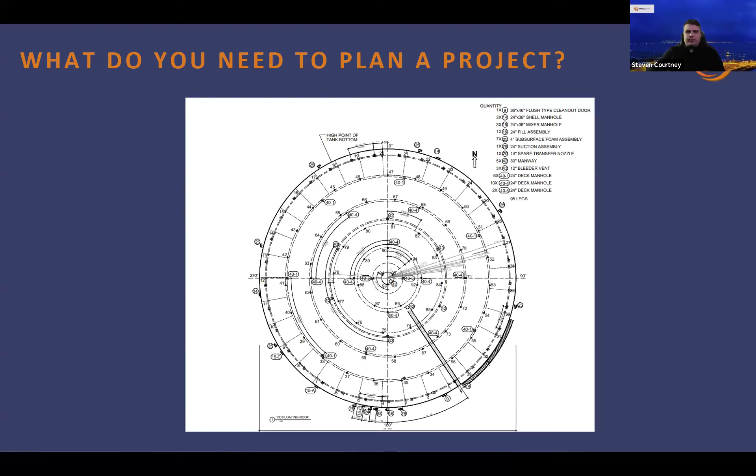So yeah, storage tanks represent a huge point of uncertainty in oil and gas operations. There seems to be a mentality that it is what it is when it comes to cleaning costs. I personally have written more change orders than I'd care to admit, and oftentimes it's not the fault of the cleaning vendors or the contractors on that end. If you're not given clear information, how are you supposed to put together a budget and execute that in a timely fashion?

Imagine you were asked to quote a project where you're told there's basically going to be 12 to 18 inches of pudding consistency slop in the bottom of a tank. You build your plan, you pick your equipment, you bring the crew out, and you pull the doors off, and there's 5 feet of packed sand across the floor of that tank. What do you think that's going to do to your budget and timeline? And I can tell you, because that's actually a true story, and it was part of the inspiration for getting into TankScope and tank profiling, and just feeling like there had to be a better way.

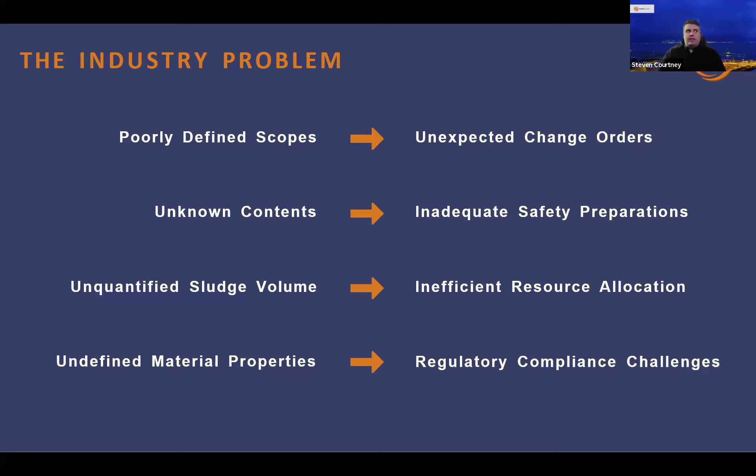We often hear from clients of timelines and budgets exceeding 400% of the set budget, and getting stacks of change orders that are continuously piling up, and it's really just not an acceptable way to manage these kinds of circumstances.

So we're going to start by talking about some of the historical methods of tank assessment. Historical is probably too kind of a term, because these are still things I see going on in this industry almost every day. We come across similar types of tank assessment methods, if you want to call it that. The most common thing that you see on every tank is just historical tank tracking.

And it's really just a nice way of saying, asking someone what was in the tank last time they cleaned it. I've been asked to call people who don't even work at the company anymore or are retired to figure out what was in that tank the last time they opened it. And that's 20 years ago in some cases, and obviously retired and out of the business for a while. These are not accurate or reliable sources of information.

Next thing we see a lot of is thermography. When done well, it can be a useful tool, but the truth is it's more of an art than a science at times, and we see a lot more bad thermal data than we do good thermal data that leads to inaccurate RFP, RFQ assessments. And even if you do get accurate data, it's really only indicative of what's going on right at the shell side of the tank, right where the sludge is in contact with the walls. It doesn't tell you anything about what's going on any further into the tank than that.

And the next thing we've seen over the last couple decades is sonar technology coming out for tank assessments. It has a lot of limitations and can provide some pretty inaccurate data. In my experience, it struggles with things like water in storage tanks, which is a natural byproduct of crude production, and it's in there until it settles out and can be dewatered. It also struggles in low sludge environments, overrepresenting sludge, which can lead to completely misrepresenting the tank contents.

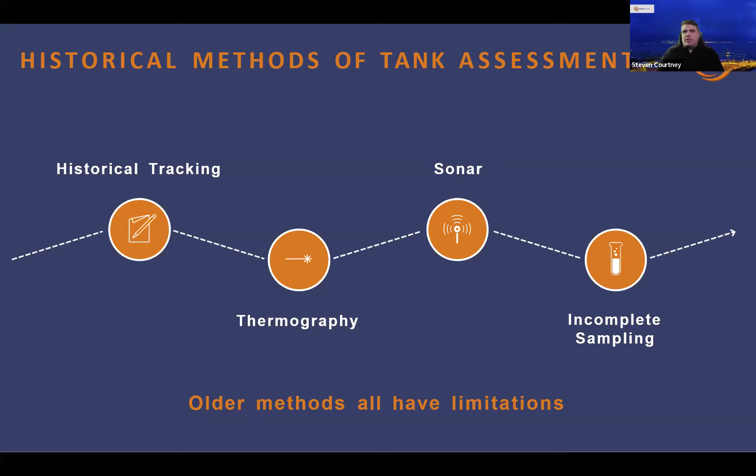And even if it is accurate, again, a little like thermography, you're not getting the whole picture because you aren't getting the actual material samples, and it doesn't know the difference between an emulsion and a heavy sludge or different types of sludge in a tank. So that ties into the incomplete sampling idea. It's not uncommon to get a sample off of a low valve or a water draw and have someone say, well, this is from the bottom of the tank, so therefore it's the sludge. Well, if you have sludge piled up against a far wall, obviously that's not representative of what we're trying to capture here, right?

So what are the consequences of these types of planning methods? The obvious ones, as we touched on earlier, is change orders. I think that's something that resonates with a lot of people. And just the cost changing from what was budgeted, but not just that, but the project timeline extensions and having your tanks out of service for an extended period of time. Not being able to utilize that asset can be a much larger cost than even just the change orders and the extended costs in the field as well.

The other thing is safety incidents and environmental noncompliance. If you aren't actually quantifying what that material is, the hazards that are associated with that material in a real quantifiable way, then you can't say that you can actually build a proper safety plan or a proper disposal plan if you aren't actually getting accurate information about what that material is.

So that brings us to the solution here. We see this as a three-pillar approach. Number one is volume assessments, but not just the volume itself, but a map of the distribution. Where is it located in the tank? Second is material characterization. So not just how much is there and where is it, but what is it? What is in the sludge? Are there hazards associated with that? Is there maybe good material associated with that? Oftentimes we see really high hydrocarbon percentages that could offset the cost of a lot of these tank cleaning projects that often go to disposal or otherwise are wasted.

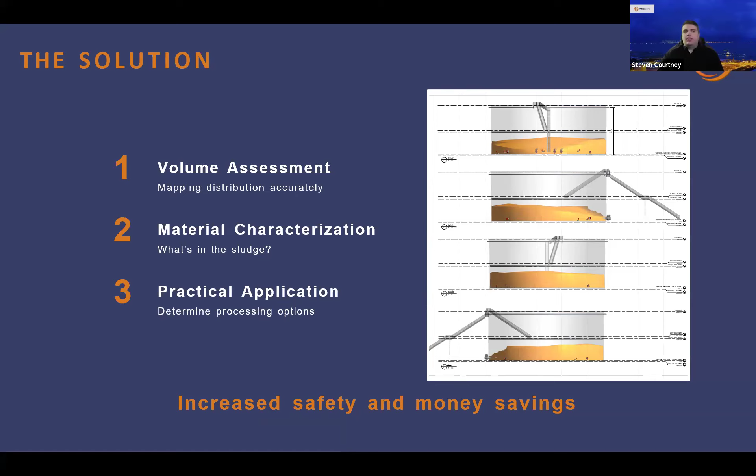And that ties into part three, which is the practical application. Once you have all this data, the volumes, the locations, the distribution, material characterization, what can you actually do with all that to improve storage tank management, storage tank design, and cleaning and sludge removal and recovery? So we're going to touch on all of these as we move through here.

So first thing, as I said, accurate volume assessments. Expanding past thermography, to get a proper volume and distribution and topography assessment, you actually have to go and take data from across the surface of the roof and the tank area to build and integrate an actual distribution profile. You can get very accurate data this way, and it allows for much more accurate planning of tank cleaning projects.

For example, even just from this picture here, you can see if you were to try and jet mix this in a standard way, you'd likely try and circulate it and/or mix it from all the different quadrants of the tank. And really, you'd probably be wasting 2/3 to 3/4 of your time attacking sections of the tank that don't even have sludge, when you could do a much more targeted approach and figure out where exactly you should be attacking this from and how to best manage this.

And it also gives insight into the type of equipment. Will you have enough effective range to really reach this? Do you need to go through the roof? Is there going to be something left for cleaning at the end? And then even some basic insight into, well, if we've got sludge accumulating here, maybe we can look at better jet mixing nozzles or better mixers as we progress past the cleaning and into permanent sludge reduction, which would be the goal. As nice as it is to have good planning tools, ideally removing the need for all of this would be the end goal.

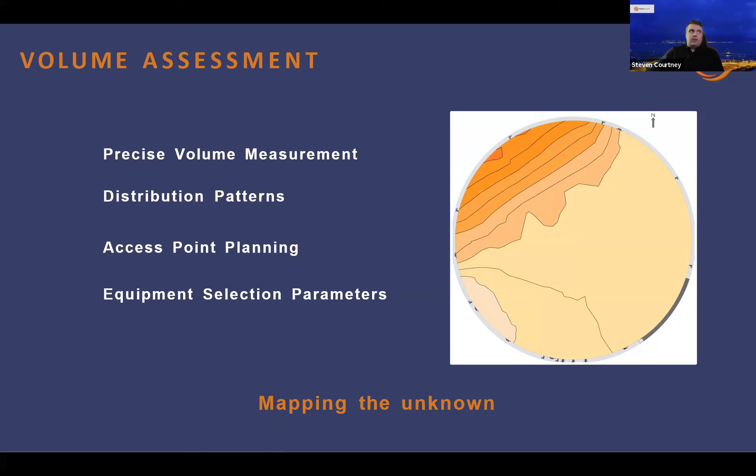So looking past that, oftentimes characterizing just the heavy sludge material in a tank really isn't good enough. Oftentimes tanks will have areas of free water, over near a water draw. They can have a heavy sludge layer, a lighter sludge layer on top, and then even some kind of rag layer and emulsion. So getting all this information is key to actually assessing a tank for cleaning and maintenance.

Really, the trick here is you have to actually go through the vertical column of the tank and delineate each layer using properties of the material: density, viscosity, temperature, water content, looking for things that separate these layers, and then actually capturing those individual layers and stratifying the tank in a fashion that allows you to capture each material and take those materials for assessment.

This can also be really useful. Sometimes we come across tanks that people think don't have problems or are empty because there isn't heavy sludge material accumulated. But actually taking these kinds of measurements can either prove that to be true or prove it to be false. Maybe you have a rag layer or something else that's harder to identify, but could cause issues in processing, or in cleaning, or could be indicative of other issues upstream or cause issues downstream.

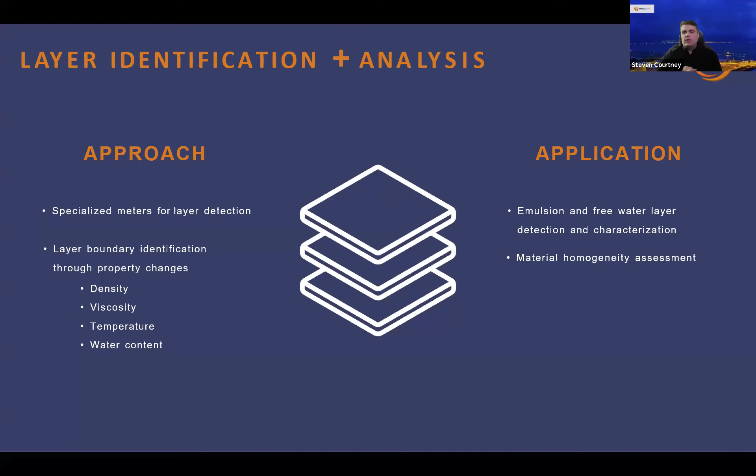So now you've delineated your tank, you've got your individual samples of each type of layer. What do you do with all that information? The next couple of slides here are kind of the meat of a lot of the material characterization stuff that we touched on. We're going to cover it as best we can at a high level here, but we're always open to further conversations on it because I know there's a lot of dense material here.

The thing that we see most commonly done for sludge is simply your BS&W, which is a useful test. For example, this was a real one. The numbers are a bit small, but you're looking at almost 85% hydrocarbon that was slated for disposal. So now you're paying to remove it from the tank, you're paying to dispose of it, and you're basically losing all that perfectly good product. So you're paying for it in multiple ways, multiple times. That alone isn't good enough to assess blending and stability and to give you the best idea of what your options are for sludge management.

The goal is to break these things out as far as possible. So breaking your hydrocarbons out into their constituent parts and breaking your solids out into their constituent parts, which will actually show you if you have things like pyrophoric material in that tank, or indicators of rust or other things. Sometimes there are things you can find that really aren't supposed to be in there, maybe coming from somewhere upstream. So you're going beyond just the size of the particle and really looking at what's going on within this sludge, which is always this combination of water, hydrocarbons and solids that create these tank sludges.

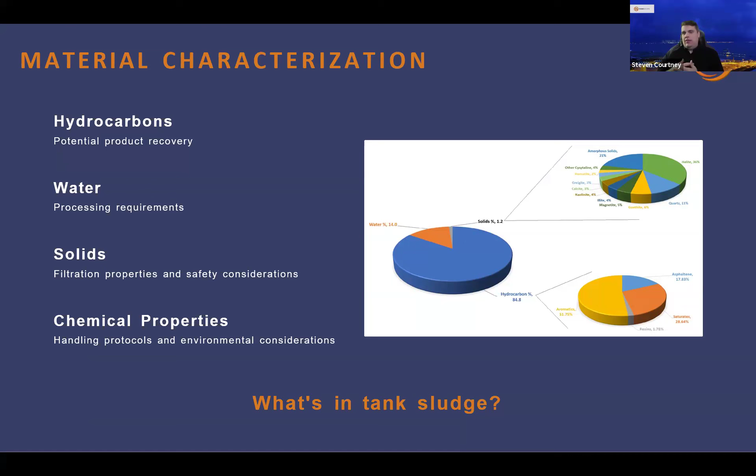So I touched on a little bit of this, but what are the actual tests that give you this kind of information? The first, number one key one, is SARA testing. Saturates, aromatics, resins, and asphaltenes are what predict something called colloidal instability, which is really just a fancy way of saying oil stability: two different types of oil, will they remain stable if you blend them together? So in these kind of tanks, the most common thing is to find a cutter stock and mix it and try and remove that sludge that way.

And/or sometimes even just a change of service, look at whether or not your oils that you have in different tanks are compatible, or whether you're going to drive some of these asphaltenes and other things out of suspension, right? Taking that a step further, that's really a predictive test, and you can do actual bench blend testing to assess the feasibility or to confirm the feasibility of different cutter stocks and actually apply that in a real environment prior to taking it to the field, right?

Moving into the solid side, particle size distribution is huge for things like filtration, picking the right size of filter, and not having either too much or too little. You can really get a good distribution of that. And then as far as breaking that material down further than size, it's a combination of scanning electron microscopes and X-ray diffraction, which I won't get into the details on here, but it allows you to actually quantify each type of material. And that's part of this image you're looking at.

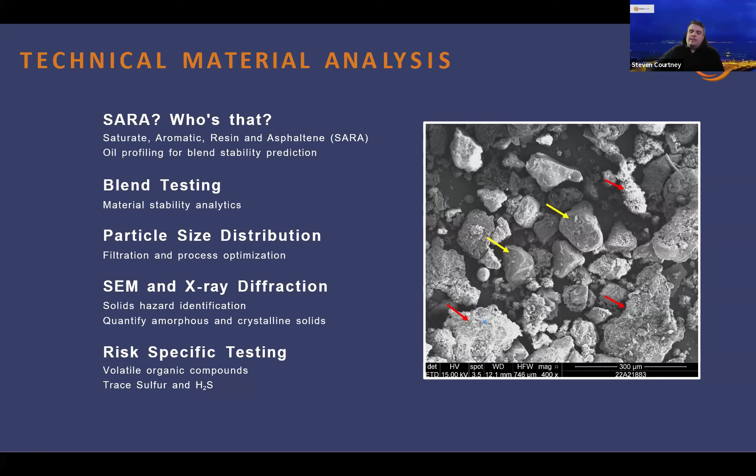So, in my opinion, only with all of that information do you actually have enough material now to properly plan and execute a tank cleaning project. And it's not something that I've ever seen when I was asked to do this kind of work, and it's not something I've ever seen elsewhere. You can actually probably predict out of service time. You can properly address the hazards, create proper safety plans, proper disposal plans.

Maybe depending on the nature of the tank, if you look at the properties or profile several tanks, you can predict or make decisions on what's the best order of operations. Is one more problematic than the other? If maybe they can all be done in any order, maybe it's best to restructure them so you're dealing with the most problematic things first, and then dealing with some of the simpler things on the back end, or vice versa. But at least you can make those decisions with a clear set of information.

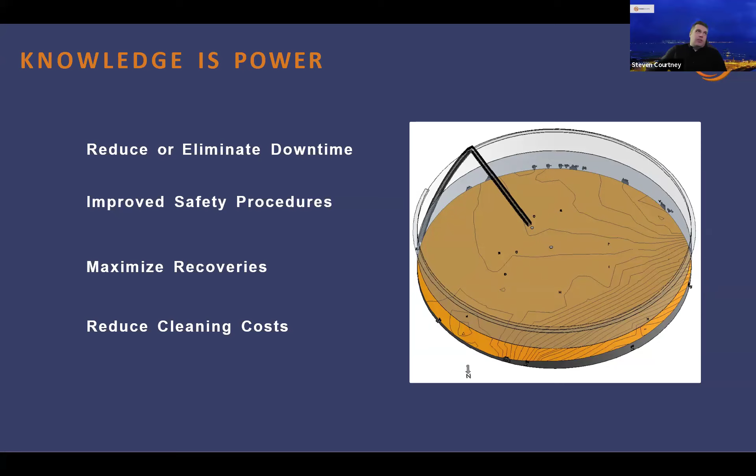So you're not taking a tank out of service for allegedly a month and then having it turn into 6 months. Well, the other tank is now coming up for service, and you backed yourself into a corner, right? So I'm going to show you now with a couple case studies how this kind of works in the real world and what it's looked like and some of the successes here with this kind of process and procedure.

Basically, they were going to take this out of service because obviously there's some kind of issue going on here, but we ran through this procedure, pulled the samples of the sludge, and there's two or three other products that they looked at being able to store in here or use as cutter stocks.

And we went through the SARA testing and did the blend testing and found something that was an extremely good match that actually broke this stuff up and allowed it to remain stable so that it could be shipped through the pipeline or moved to another tank, and it wasn't just going to drop out of suspension, because if you have unstable blends you might just be moving that problem to somewhere else, right?

So all that was done here was a change of service to something they would have been storing somewhere else anyway, and the sludge chemically just melted out of this tank over the course of the coming months, and the sludge reduction on it was extremely high. And basically you're getting 100% of this material back, you're getting your storage space back, and you don't have to use any mechanical cleaning or mechanical methods just by having the information to do this kind of assessment, right? And actually figure out a better solution that maybe wasn't initially apparent.

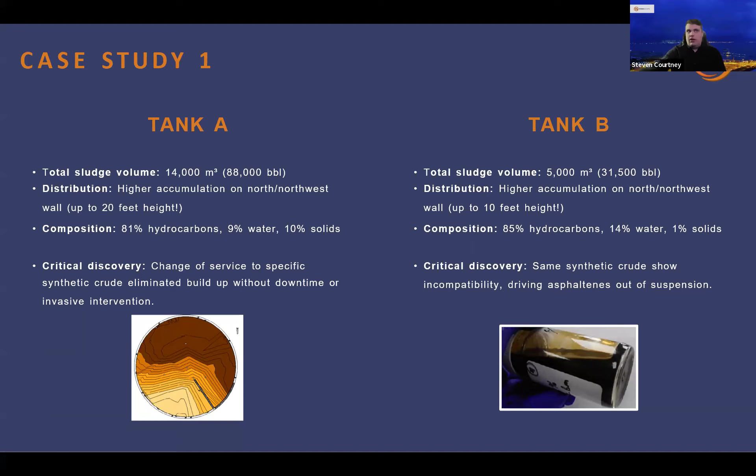This is just a solid layer of asphaltene that would have been created in trying to use the same methodology applied to two what you would think are similar tanks, right? And so that just shows the importance of each tank being different, and every tank can have completely different results, even if you would assume similar results. So this was done with a more traditional jet mixing and mechanical cleaning, using the oil that was already in the tank instead of switching service, and also was successful, but just in a completely different way, right?

Moving on to case study 2 here, it's kind of the opposite, and we touched on some of the poor techniques that are used that don't actually capture the sludge and take the samples properly and do this assessment properly, and the kind of results you can get there. So this was a client, they had some poor thermal data, and more to the point really inaccurate sonar data that told them they had 9 feet of sludge in most of the floor of their tank. And obviously they had made a big plan with a big OpEx budget for centrifuging and jet mixing and sludge removal, and it was coming out of service early. So this was a big problem.

And we were asked to come down and take samples on this tank. And we ended up proving that there was no sludge in this tank, and the sonar, the interference, whatever it is, had just returned false results. And we took actual density viscosity measurements throughout the whole column in multiple locations to prove that there was no sludge layer in there, took actual samples, and these are sludge samples compared to the oil sample, and you can see they're both saleable oil, and did that in a variety of locations, and managed to get this tank delayed out for several more years because it didn't have to come out right away. So again, actually getting this information the correct way and the samples the correct way is key to all this.

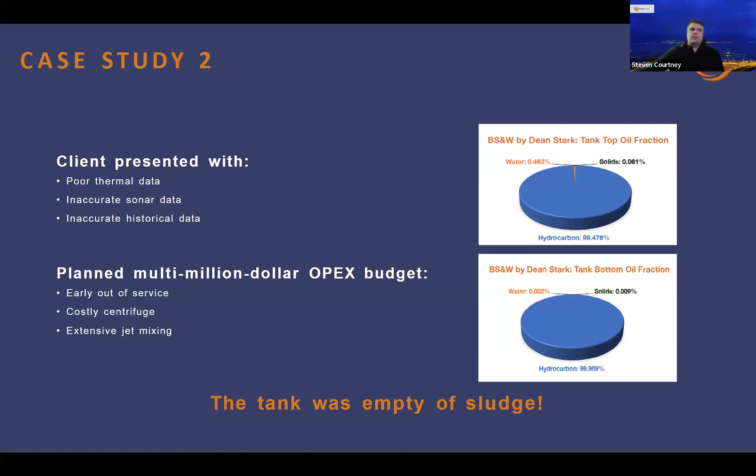And then you can make assessments about, do you attack it from the roof with maybe a roof jetting nozzle, or is it okay, you're going to go in and get it. But maybe, if you can prove that you don't have the effective range, this is a lot cheaper and easier than trying to circulate a tank for 2 weeks just to find out that you are not having the effect that you think you are, because you just don't have the critical velocity to break up that sludge or something like that, right?

And so this is a very powerful tool, and given that we actually have the proper material data from the profiling side, you can get much more accurate simulations than you otherwise could, right? You're not guessing at the oil properties or anything else.

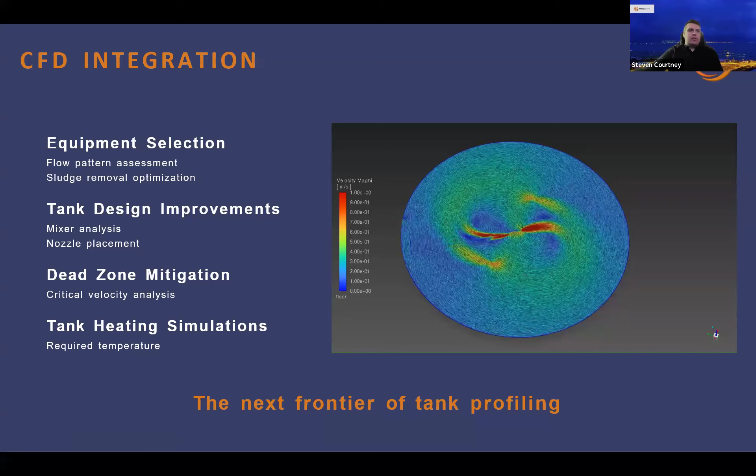And that really just brings us to the conclusion here. So the hope here is to change the way you look at tank sludge, turning something that's typically a problem potentially back into a resource, or even a cost offsetting benefit. The goal here is to remove all of the guesswork, right? And at the core of this, to eliminate change orders, something that I think everyone here is probably much more well versed in than they'd like to be. And so with this kind of information, there's some accountability that you have what you need to properly plan a project, right? And there's no guesswork going in, and there's no, well, you didn't tell us that this was here, and whatever else comes from that, right?